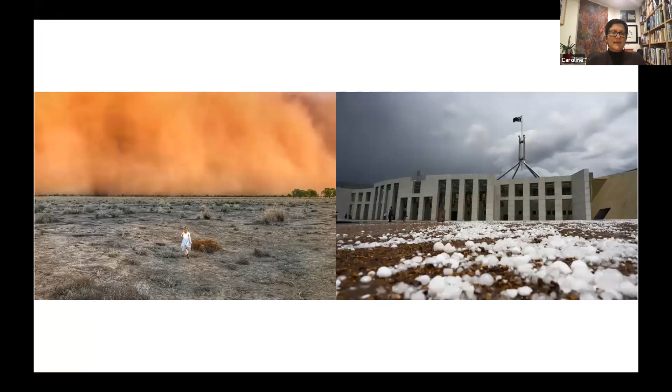And here we are. After that, we had dust storms, we had hailstorms, then we had floods—and we had floods even in the bushfire areas, as if they hadn't experienced enough.

Then along came COVID and a whole lockdown and a whole new way. And stunningly, we all took the science on board and acted quickly and found that change actually can happen rapidly and in huge amounts. It's very interesting.

And still it wasn't the end. Then we've just had this whole episode of yet another black man being killed. And it's not just in the States, it's here in Australia. And there's so much to deal with. But, you know, there is, as Audre Lorde says, there's no such thing as a single issue struggle, because we don't live single issue lives. And all of the things that we're currently experiencing are connected. And we just, you know, we need to kind of do something.

And I think that Vanessa Nakate sort of said, you know, we can't go back to what used to be. We need to really radically change. We need to do things differently. And we need to address all of these things together, which is kind of perfect. And I think with being totally disrupted, it's kind of the perfect time to do it.

So what can architects do? What should architects do? Well, first of all, I think, you know, congratulate every single one of you who have joined up to Architects Declare. And as of today, there are 906 signatures, which represents way more than 906 people, because collectively we can do an awful lot.

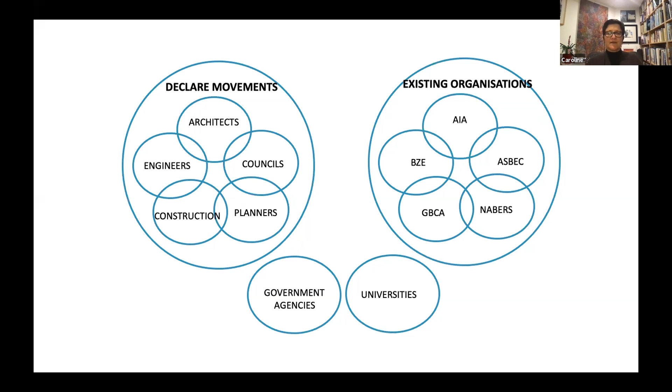There's a whole bunch of declare movements. There's the architects, engineers, there's councils, planners, construction, and I think together we can all help each other achieve what we've signed up for, but also support each other in making bigger asks. We're also working with existing organisations really closely who have been playing in this space, and let's all work together. We're working with government agencies and with universities.

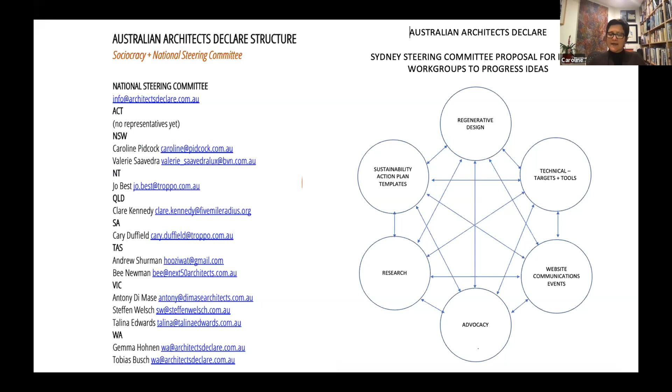We've set up a number of different task groups on regenerative design, sustainability action plan templates, technical targets and tools, website, advocacy, research. All of these will be, we're going to be asking people if they're interested in helping us with these different task groups in the very near future. There's lots of work to be done, but it's kind of exciting to be working with people caring about this.

The mission, which is on the website, there's a number of different points. I'm just tonight looking at Passivhaus, I'm just looking at a couple of ones, particularly the ones about regenerative design, because I think that's actually one of the key things that architects can contribute to, and then whole life carbon modelling. So you know what architects are good at? We're very good at understanding complex systems, how they connect and intersect, and how we can creatively realise the potential in the systems for the benefit of all.

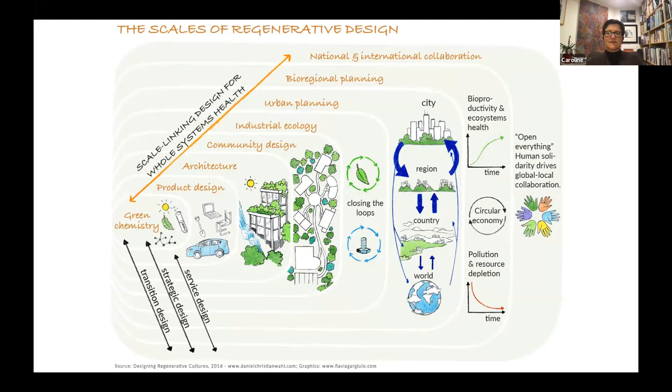We're so uniquely placed to do this, and right now that is what's needed, and it's such an exciting opportunity for us to step into. You know, the whole regenerative design happens at all different scales, at all different sizes, and I think what we've got to do is focus our attention on how we can create so much better things at all of those levels and connect them all.

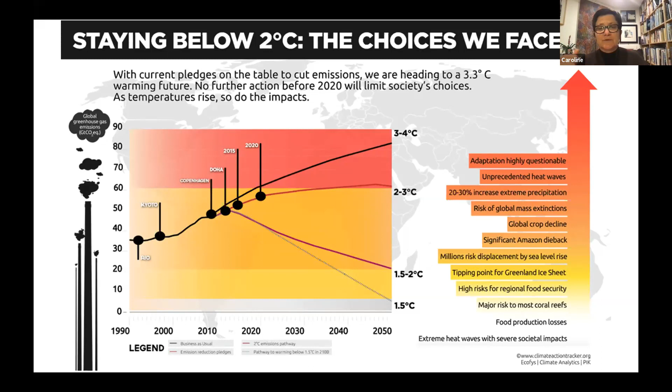Here's another one from the Climate Action Tracker, which shows again. So this is not a tweaking of what we do. This is not a 'put it off till next year or the year after.' This is serious stuff, but it's not that we can't do it. We can. It's just that what we've got to do is really focus our attention on different things, on how do we create fantastic buildings that we love living in that also address this.

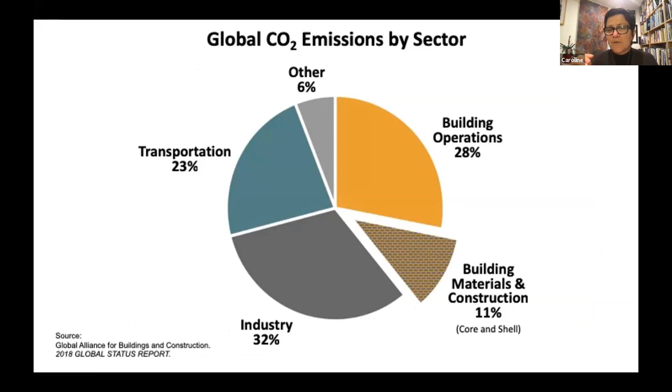Building operations - this is global CO2 emissions by sector. Building operations at about 28%, building materials, that's embodied energy, at 11%. So architects are playing in the space of about 39% of global CO2 emissions, and there's so much scope to do so much better.

In the UK, they've really named the targets that look at operational energy, embodied energy, and potable water use. They've split them into domestic buildings and non-domestic buildings, which are basically the two main types of buildings that will be built over the next 10 years, and looked at the targets that need to be hit in those spaces.

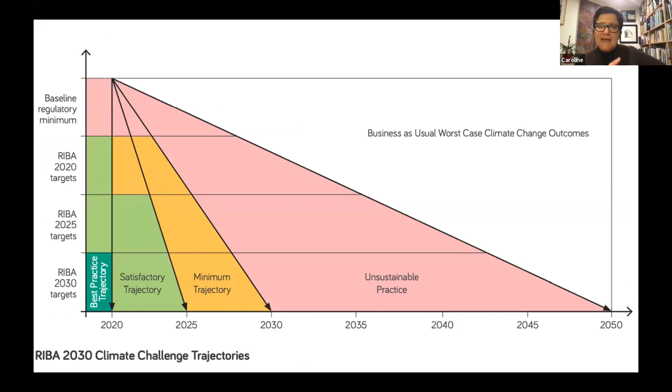In Australia, we've looked at operational energy, and tonight we're going to look at how to reduce that significantly. Embodied carbon is a whole big area we all need to address. And water use - I think Australians are fairly leading in that because we're a country of drought and little water. But this is kind of what that looks like. It's a serious dive down. So we've really got to look at how we can achieve these really big targets really quickly.

The LETI is the London Energy Transformation Initiative. They've done a whole lot of work. We're talking with them, and I'm working actively with a whole bunch of people, from Engineers Declare to Architects Declare to the Institute of Architects, ASBEC, BZE and others, to try and translate this. LETI have said they'd give us all their information, and we'll try and do something to work for Australia.

So within all of that, thank you, Passivhaus, because here's a fantastic way of really creating really healthy buildings that have absolutely minimal energy consumption. That's kind of where we need to be at the very least. And then we need to also look at embodied energy as well, within the framework of really regenerative design.

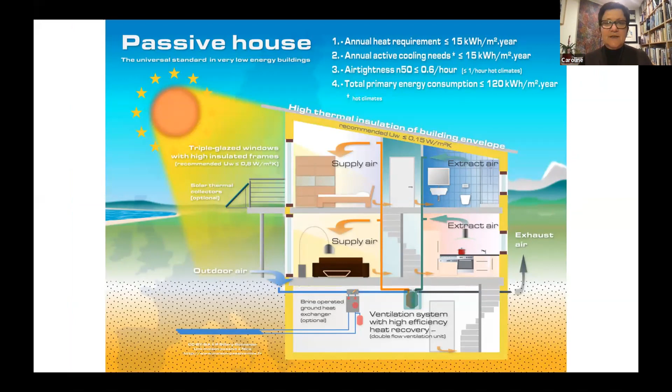So the Declare movement is actually an invitation to be part of co-creating the regenerative future we need. So if you're not already signed up, it would be great for you to get involved and be part of it. Take responsibility for achieving this with us and help us do it, because together it'll be a really exciting and interesting journey. And it's a journey we just absolutely have to take. So thank you very much.

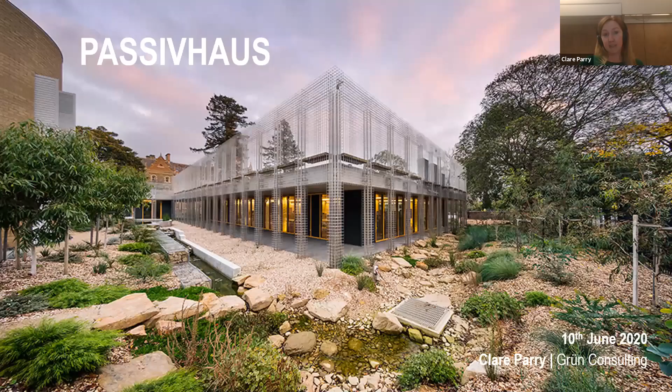But tonight I have to focus - I have to just talk to you about Passivhaus. There's a lot that I have to say about Passivhaus, but there's a lot I can't say tonight. But if you do have any questions, please get in touch with us. One thing I will say is that you can't unknow Passivhaus, and this has been my experience. I came across it about 12 years ago, and now I run a Passivhaus consultancy. That says everything - once you know, you can't go back.

And the reason you'll continuously hear about it from anybody who knows about it is because they love it. So most converts I know change the way they work. I hope that's true for some people here. The other thing I will highlight is that you'll start seeing thermal bridges absolutely everywhere you go - window frames, structure, anything you see. Thermal bridges everywhere.

My recent foray into it has been with my own home, which is this. So the other thing about passive house is, how do you know someone lives in one? It's that they will tell you. And I tell everyone, because particularly at the moment, particularly as we're all at home starting to realise - I happily moved into my passive house home in October, and the timing couldn't have been better.

So right up front, I'm going to say passive house isn't everything. Passive house does a few things extremely well, but it does need to be part of a bigger holistic picture. It does efficiency, health and comfort. It doesn't do embodied energy, it doesn't do water, it doesn't consider transport. It's part of a picture.

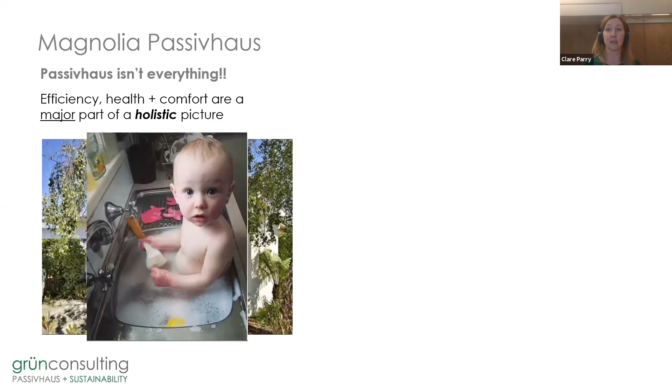So with my home, we like to joke that we did this renovation because we outgrew the bath. Really what we did - we had a really old house, 110-year-old double brick. The big problem with real estate is that you often don't get to choose what you buy, particularly in major cities. You take what you get, so every building you buy often has a lot of problems. This was very true of my own home. So we knocked off the back half and rebuilt it.

We've very quickly learned, particularly in the last few weeks, that the old bit is extremely cold - it's about 12 degrees inside most of the time. Luckily, I'm working in a passive house.

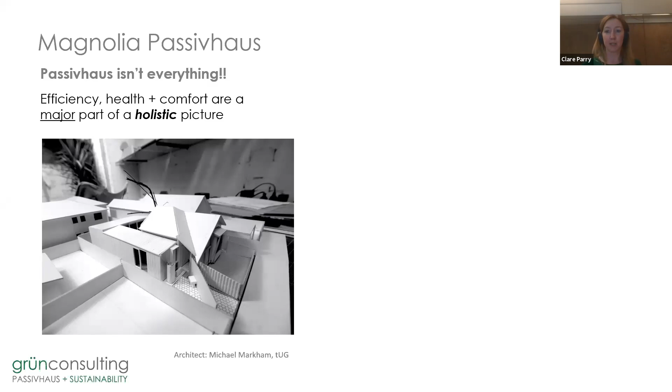So part of the bigger picture with this particular project - and I'm a big advocate for rating tools like the Living Building Challenge - we took our inspiration from it. I actually did want to certify it to the Living Building Challenge; it was just a bridge too far on this project, but highly recommended, Living Building Challenge. So red list free, focus on materials, absolutely. Dematerialization - it's timber lined, there's no plasterboard for example. Triple glazing, double stud walls. So the thermal performance aspect was just a part of it. Renewable energy, no car parking, for what it's worth on a single family home, and rainwater as well.

So one thing we're all quite familiar with is the concept that it's really hard to convey big ideas in a concise way. But I think that's what Passive House does extremely well - it's 5 things. So the takeaway from this presentation, I hope, is that if you do a few things really well, you can still get a great building. I'll go through these in a lot more detail shortly.

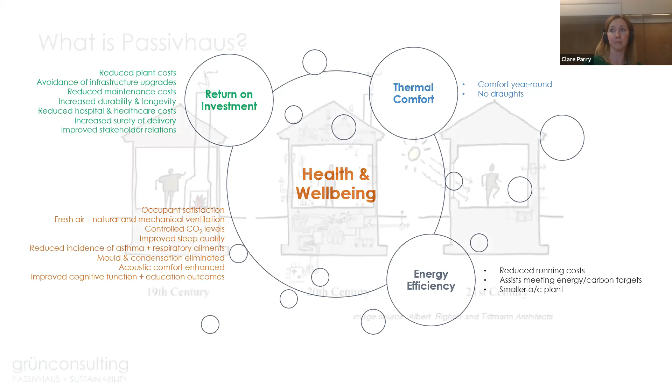One of the neatest ways I think I've ever seen Passive House summarised is this. Back before we had technology, buildings were pretty simple, we could consider them pretty dumb boxes. We added heating in winter and that was about it. As technology advanced, buildings kind of didn't, so we started to just overlay tech fixes to problems that we've actually realised shouldn't have existed in the first place.

This 21st century solution, this new idea, is that buildings should do most of the functions that a building performs without tech solutions. Then there are a few straightforward systems that can provide, for example, ventilation and supplementary heating and cooling, which ends up being much, much smaller, drastically smaller.

This is Elrond Burrell, he may even be on the call, hello if you are. The best way I've ever seen Passive House described is think of it as a Porsche, maybe compare a Porsche to a Ford Focus. They're both cars, but the experience of driving one is absolutely different to the other. It does the job, but it's not the same thing. So one thing I would recommend, one thing I would probably say about Passive House, is you probably aren't going to comprehend it exactly until you've been in one.

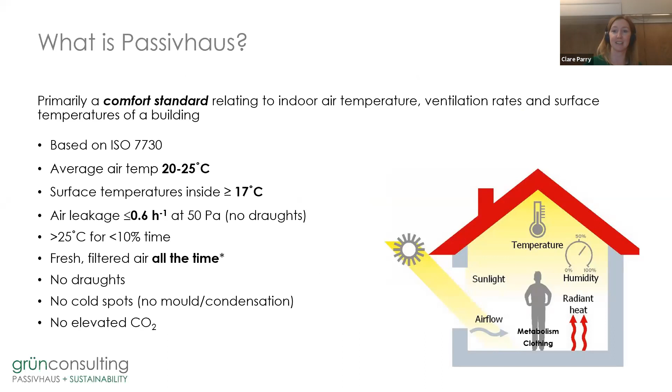Without going into this in too much detail, Passive House is a comfort standard. These are all the metrics. It's quite a technical standard, created by physicists. As a result, I'd almost say it lacks a bit of marketability. German physicists aren't known for their sales ability.

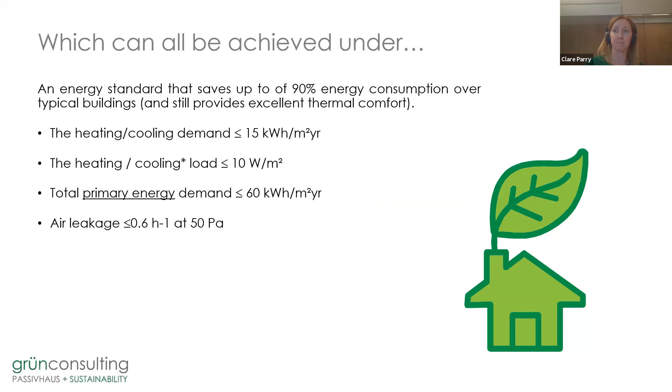But all of those metrics, which basically equal comfort, can be delivered under an energy standard. These are the numbers - this is what, if a Passive House meets these numbers, it's a Passive House. But leave these numbers to the Passive House designers. Don't get caught up in needing to know about the physics.

I'll help you understand what those 5 rules are. Number 1, high level of continuous insulation. The idea is that it's not interrupted essentially, and that might sound extremely simple.

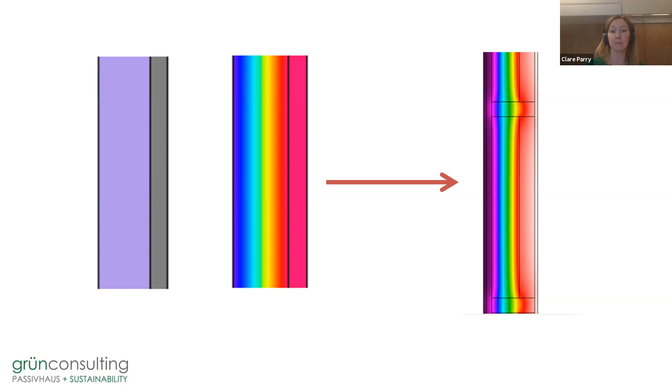It's not achieved well in practice. For example, the code - it's getting better - led us to believe that an R2.8 wall was an R2.8 batt in a stud wall or whatever it might have been. In reality, once you involve that stud in the construction, it breaks it down so that it basically interrupts insulation, reducing thermal performance slightly. So what might have ideally been an R2.8 wall might actually be R2, which can be accounted for and should be accounted for, and is tolerable in some sense.

What isn't exactly tolerable is when you put high conductivity materials into those walls. There are versions of construction that don't work so well in passive house. I'd say a great way to overcome this is to separate the structural and thermal lines. That's an easy win, but a passive house designer can help you overcome all these issues.

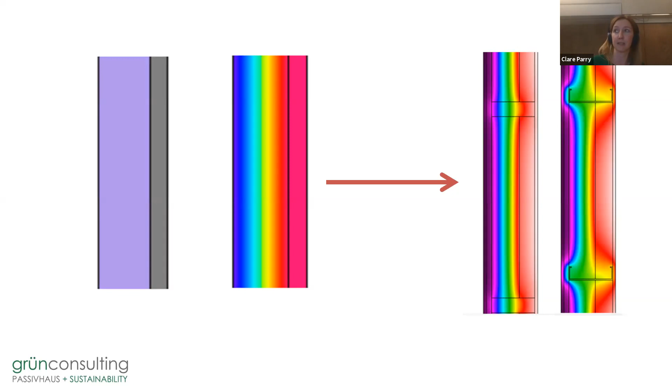Number 2 is airtight construction. It doesn't mean the building is airtight - the windows should open. This means the envelope is airtight. And what that essentially is saying is that air should be controlled.

It's not an airtight building, as I mentioned. Airtightness has started to come into the code, so you can now comply with it - it was always there, but it was descriptive. It wasn't enforceable - you could sort of say, yeah, I tried, but how hard did you try? You can now use blower door testing to comply with the code, but it is an optional element. It has a massive impact on performance.

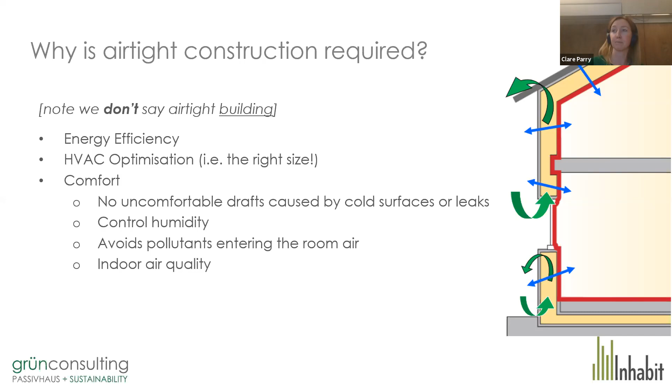What we are trying to say is that air doesn't go through the envelope layers - that undermines thermal performance entirely, but it also doesn't come into the building through uncontrolled gaps and leaks. Also, don't think of airtightness as this plastic rain poncho. Think of it as Gore-Tex. The building still needs to have vapor permeability, ideally, which is also creeping into the code. This isn't technically something passive house demands, but it is absolutely good practice.

Number 3 is minimise thermal bridges, which are much more prevalent than we consider, especially in Australia. Often we have expert architects from pretty much anywhere else in the world come over and say, I can't believe the way you build. I think it's something most people just aren't as aware of as we need to be. This has come into the 2019 NCC.

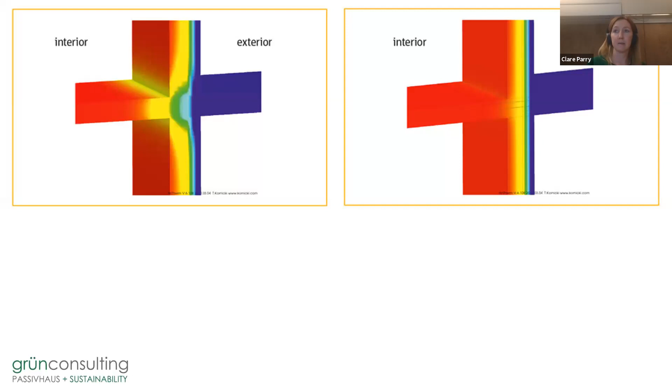You see a lot of these pretty pictures in the passive house world. These are thermal heat flux images, essentially showing temperature. So in this one, blue is cold, red is warm - 20 degrees on the inside. Thermal bridges are just where heat flows from inside to outside.

How this impacts us is really vapor damage. Humidity is prevalent in air - all air has moisture in it to a varying degree. Where we have thermal bridges, what plays out is either visible or interstitial - so in the construction - moisture damage and rot, deterioration. They're bigger issues than we give them credit for.

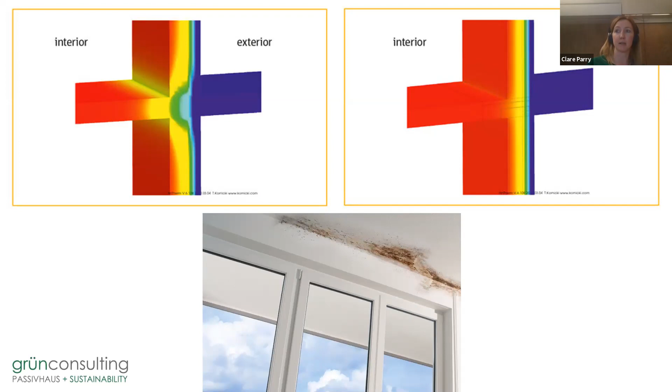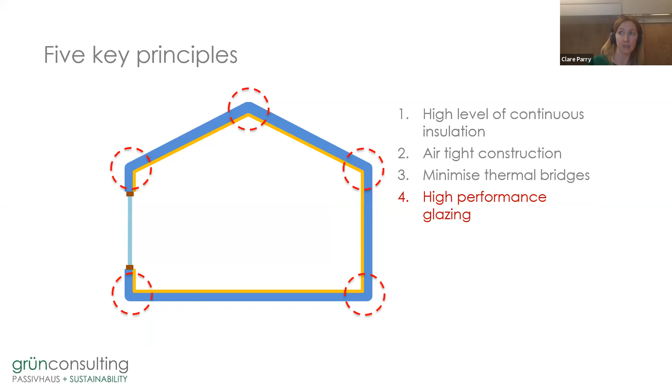High performance glazing, very, very important. If we consider glass or the windows, the entire window to be part of the thermal envelope, it should ideally perform as close to the wall performance as we possibly can. The thermal losses through windows and frames are typically the very worst performing element in an entire building for thermal transfer. So we go to all this trouble of insulating a building and then we put poor windows in. It's very much a waste of time.

Condensation at best is annoying. At worst, it creates mold, health issues, respiratory issues, and condensation should be designed out, and it's actually practically designed out in a passive house design.

Now, the ventilation system. A ventilation system isn't mandatory in passive house, but it's kind of the ribbon that ties the whole concept together, or the cherry on the cake. Once you have an airtight building, you need to consciously ventilate it, and ventilation is just a function of healthy spaces. This can absolutely be natural ventilation, but then among other things, you get 0% heat recovery.

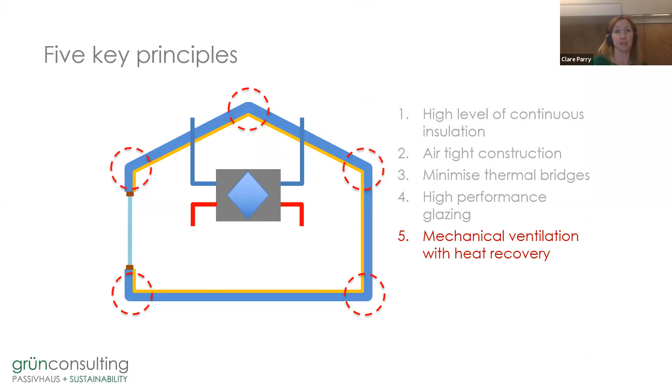And as well as that, you have to manually intervene every time you need fresh air. You might need fresh air overnight, you might need fresh air when you're out, because you're not just providing air for people, you're also extracting excess moisture, VOCs, all sorts of things.

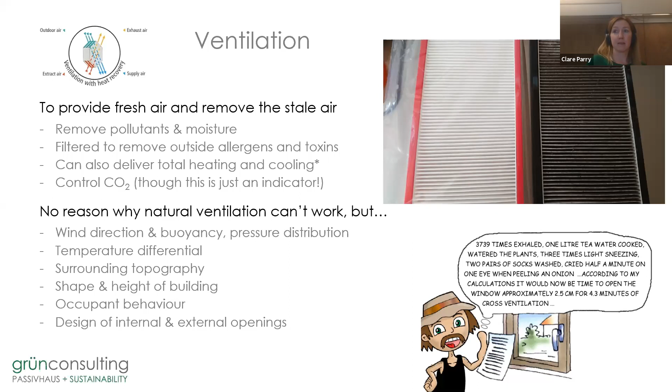In a passive house building, I'd say about 99% of passive house buildings have this ventilation system. It is actually incredibly simple. It's a core where air streams flow past each other. They cannot mix, but they flow past each other, and heat is recovered. In some systems, humidity is also recovered. It has 2 fans and a core, and it's an extremely simple system.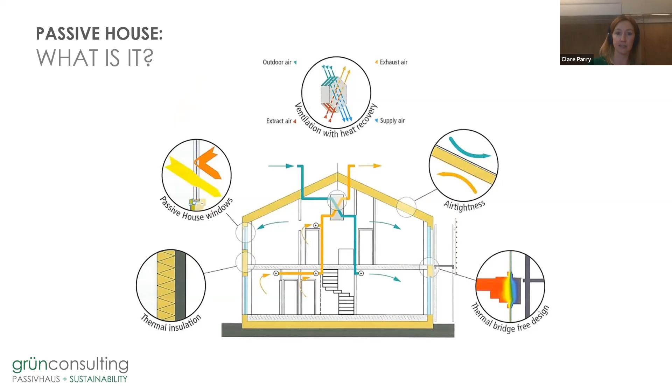This image is one that you'll probably see every time you do research on passive house. It's from the Passive House Institute, and this is just a summary of those 5 things. It's simple, I hope that's one key takeaway from that. That's passive house at its core. There's obviously a little bit of know-how to it, particularly when it comes to designing actual buildings. I've really oversimplified there, but those are the 5 key principles, and done well across a building of any scale, of any type, of any size, of any construction type, of any usage, there really hasn't been too much limitation. And I've got quite a few examples coming up.

What does passive house have to do with net zero? I think it's basically the best, or the most optimized way to get there. One of the ways, or why passive house is not net zero, is probably a good thing to explain. Passive house isn't net zero because net zero in a single building is incredibly expensive to achieve.

So net zero on site: passive house stops just short, and it stops at that point where, and it was determined for when it was first established, that's where you have a really big step change in the type of heating and cooling system you need to serve a building.

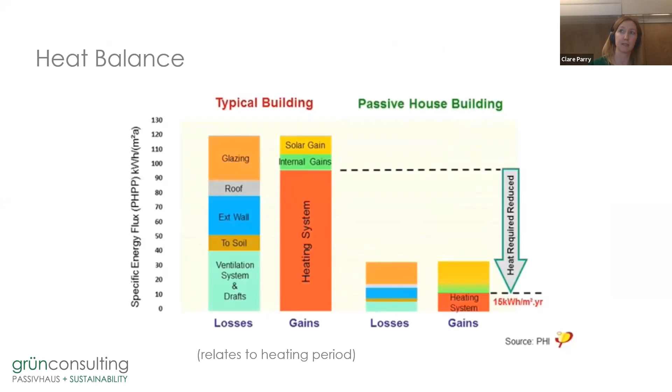Passive house is considered one of the really logical ways to get to net zero with optimizing everything. I'm not going to dwell on this too much, except to highlight that it's the heating and cooling systems, the active systems, that we're minimizing in passive house buildings by optimizing the construction or the building fabric. I'll skip past this because I don't want to spend too much time on it.

How does this fit in with the National Construction Code? I've been doing passive house buildings for about 10 years. Pre-2019 code, passive house looked like it was about 50% more insulation than the NCC in Melbourne. In Sydney it's much easier, you could probably say it's 20% more insulation than a code building, but it's about how you put it together.

As I mentioned, that whole continuity of insulation, the airtightness. The 2019 code is stated to be about 30 to 40% better than 2016. So your baseline is now a lot closer to passive house, and we've found that with some recent projects that we've examined in detail.

Some new bits in the 2019 code, and this is looking dangerously like passive house, right? We're starting to do condensation risk assessments. Airtightness, so blower door testing, is now in there. Thermal bridging is now considered in a much bigger way. So we're starting to see the elements of passive house come in, and you might be thinking they're pretty fundamental, and I'd agree.

The one thing I would say about the code though is it's still quite elemental. We still consider things in little packages, we don't look at the system, and the code is also reactive. We had big issues with complying with fire requirements, which in many ways undermined the airtightness membranes we were trying to use for a while. But that change came in 2016, and in 2019 it was refined, so now we can use those membranes again. We had massive issues for a while there getting non-residential buildings to be airtight.

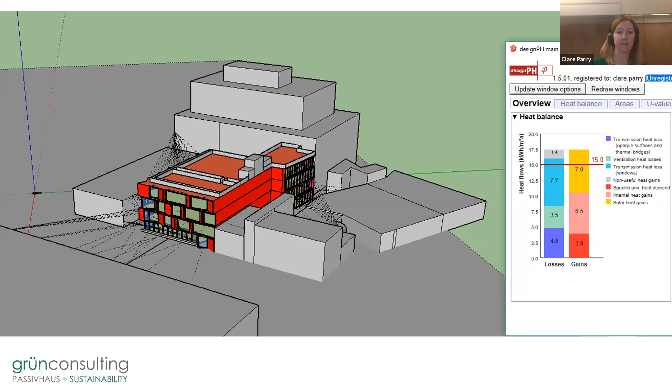It considers the site, location, context, surrounds, and shading. We also do a lot of thermal bridge modelling. This is Gillies Hall, which we'll see in a lot more detail shortly from Simon. A lot of thermal bridge modelling, particularly in 2D and 3D, capturing a lot of things that aren't considered in other design processes. As I mentioned, passive house modelling is done in an Excel spreadsheet.

It considers climate, all of the envelope performance, all of the solar impacts, including shading and surrounding topography. You also include ventilation systems, heating, air conditioning, hot water appliances, and renewable energy. One thing I probably didn't highlight is that there are limitations on how much heating your building should need, how much cooling it should need, how often it overheats, and the total energy use, which includes all the systems and appliances in that building.

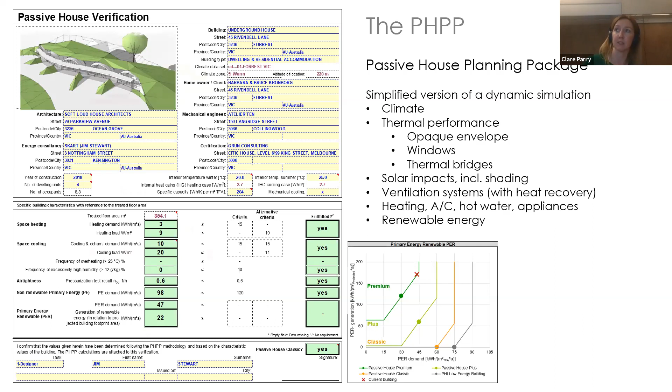Quality assurance in the Passive House world - I suggest engaging with a Passive House designer if you do want to achieve a Passive House project. None of these are mandatory though; you can deliver a Passive House building without touching any of these.

A Passive House designer has been trained and accredited, as has a tradesperson, to deliver compliant buildings. A Passive House building certifier can come along and give you this badge at the end of the day - the plaque that goes on your building to say, yes, this is a passive house building.

Certified components are not mandatory. You can build a passive house out of anything you want, and most of our projects deliver them using off-the-shelf products. There's nothing special required. The market that's catching up fast is windows - obviously you can't use single glazed aluminium frame windows, the typical ones that we find everywhere.

The certified component that I do recommend everybody uses in every project is a ventilation system, because there's such a massive range of systems out there - some of which are, to put it bluntly, quite rubbish, and some of which are amazing. And then there's certified passive houses.

That's the badge that you're looking for at the end of the day - this tiny little plaque, which Simon might share for the Gillies Hall one, but it's quite underwhelming. It's roughly, what would that be, maybe 4 or 5, or about 20 centimetres by 20 centimetres. It's optional - you can have a passive house and say you've got a passive house without getting this badge. It's an excellent form of quality assurance though. If you tie a contractor to it, they tend to pay attention.

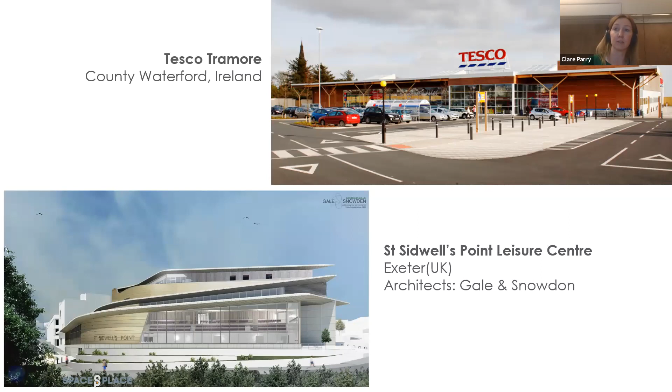Passive house supermarkets, passive house leisure centres, so huge aquatic centres - there's a few of them around the world now. Passive house high-rise commercial buildings, passive house museums. I'm getting sick of the word passive house myself here.

High-rise apartments. The Austrian embassy in Jakarta is a really interesting one - a really extremely hot and humid climate, a very successful project that's been in operation. It was one that I used to use quite a lot as an example when I was starting out in passive house. It's been in operation for at least 10 years.

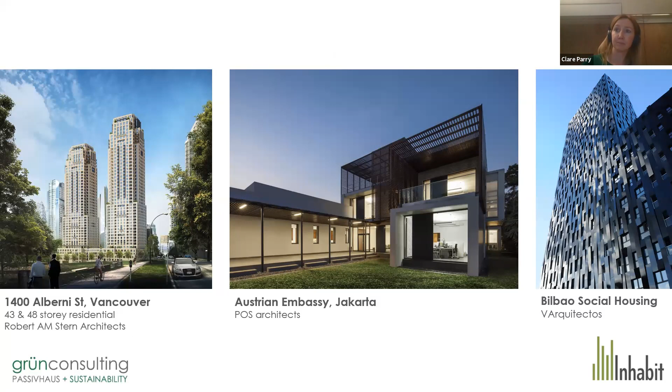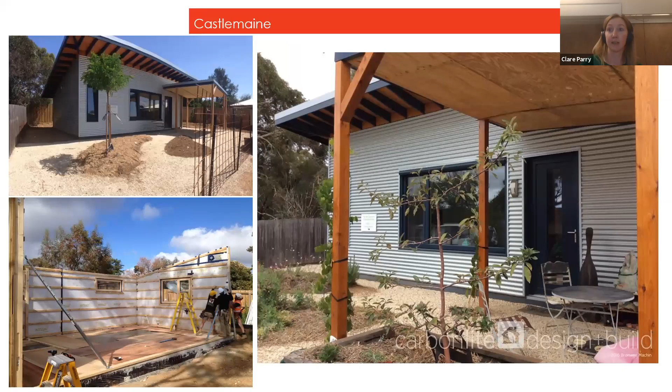That's the end of my presentation. There's a lot there, so thanks for your patience. I will stop sharing because I'm very excited about this case study for Gillies Hall and I don't want to take up too much time.

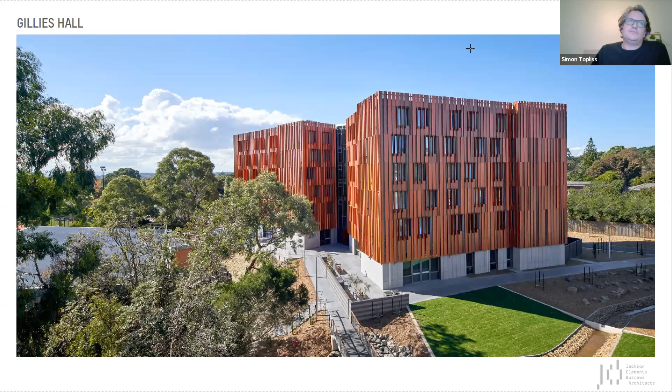It's currently the largest project, as Stefan pointed out, to combine mass timber construction and achieve full passive house certification in Australia. As a student accommodation building, Gillies Hall aligns to the university's strong pastoral care philosophy, providing 150 studio apartments and communal spaces throughout for students to cook, study, sleep, and socialise.

But the story of Gillies Hall probably doesn't really start with Gillies Hall. It starts back almost in 2014 to 2016 when we worked with Monash and 3 other firms of architects, Hayball and HRMA and MCR, delivering 4 student accommodation projects on campus.

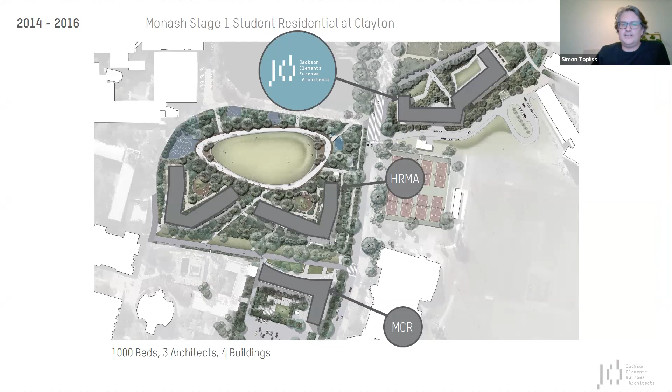We delivered the Turner building, up in the top right. These were 1,000 beds delivered to campus: Logan Hall by McBride Charles Ryan, Campbell and Holman Halls by Hayball and HRMA, and Turner from ourselves. We delivered these with Multiplex as well. These were 5-star Green Star as-built buildings, 1,000 beds delivered in 21 months.

These were exemplar sustainable design, I think, as we thought of it in 2014 to 2016 when we completed. But these were very much business as usual - precast business as usual, shading compliant glazing business as usual, meeting all Section J requirements, and veggie gardens. And we achieved our 5-star Green Star certification.

But what we ended up with was, I think, 4 buildings that as a result didn't perform terribly well. They have high operating expenditure, and the pathway of business as usual, whilst we had all delivered pretty good outcomes architecturally - agreed amongst the community - in terms of sustainability performance, operability and OpEx performance, was something that left a little to be desired. I've got nothing against veggie gardens, but it felt that maybe we just somehow missed the mark in some way.

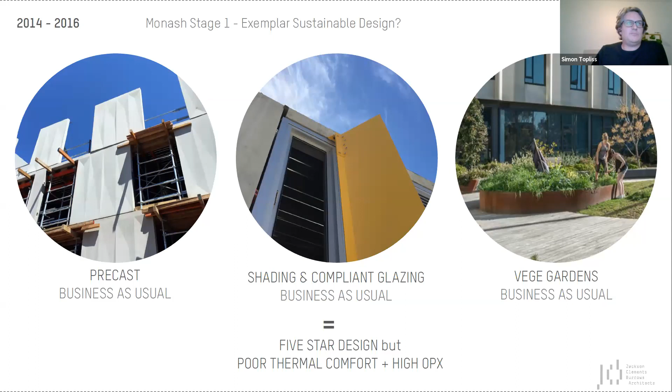So Monash, through the last decade, has really been moving forward with their net zero initiative. This has been running in parallel with energy efficiency, campus electrification, renewable energy, offsetting, and a microgrid on campus. So they're a very educated client, as you'd expect from one of Australia's leading universities.

On staff at Monash is a wonderful sustainability engineer, Rob Brimblecombe, who's been working away in the background exploring passive house from very early on. I know he was talking about it in the background when we started working there on campus back in about 2012.

And what we all sort of knew would come out of this was that the passive house standard would deliver a vastly different building in terms of carbon and energy usage.

So there was a kind of groundswell within Monash, and Rob managed to get enough people on side to take a brief out to the market in June 2017, which is when we came onto the project, to look at a student accommodation building with 150 rooms with support accommodation, and we were encouraged to attempt passive house certification if we could get it over the line.

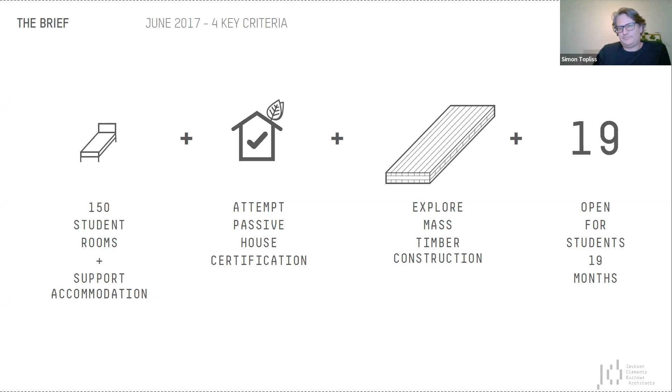We were also dangled the carrot of exploring mass timber construction, but all of this had to be done with the proviso of having it open for students in 19 months, which was quite a tall order for anybody who understands normal timeframes of projects. That was a fairly ambitious timeframe, even if we weren't attempting something innovative in terms of sustainability.

So Gillies Hall is a story about going large with passive house in a warm climate. There are a couple of small examples, but especially in Australia, there were no large scale buildings like this. We found very early on that the Melbourne climate is particularly cold in winter, so we have 6 months of really relevant temperatures for the passive house model, but we also have extreme summer temperatures, over 30, 35, 40 degrees at times in Melbourne.

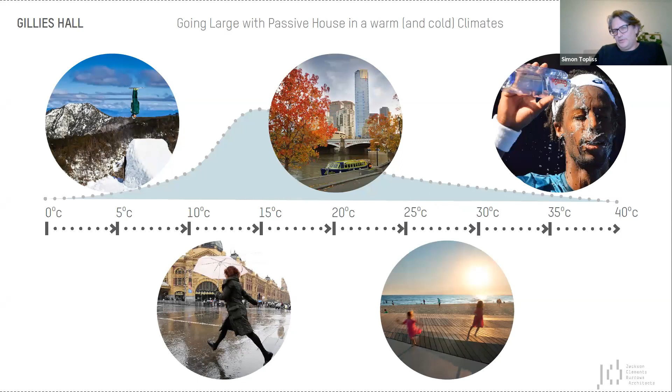It's also a story of going large with mass timber. In Australia in 2017, we didn't have any local suppliers, so we had to look at potentially overseas suppliers, trying to deliver the project in the timeframe, and trying to understand whether mass timber and passive house were really well suited to each other. And of course, from an architectural and project delivery point of view, we had to deliver this within 19 months.

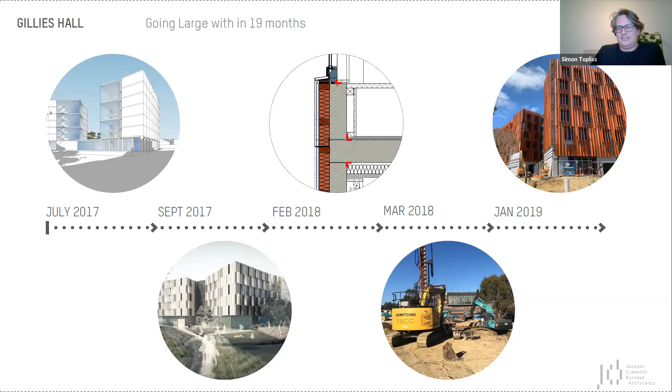So concept designs back in July 2017, go out to the market with some schematic design in about September 2017, so we could get a builder on board early enough to understand the journey we wanted to take. Get enough detailing underway by February 2018, so they could start construction in March 2018. Then hand over for students around February 2019, ready for semester 1 last year. A pretty tall order.

How did we do this? I think Claire touched on this. We all got on board from day one - client, architect and design team, and then Multiplex the builder when they came on board. From the client side, this was having Rob Rimbicum as a sustainability engineer, and two fantastic project managers from Monash, Ryan Spittle and Richard Felcher, who were there to support us through the journey and help with procurement. There was also the greater PCG to assist and endorse where we were trying to take it, and a design team ready to go from day one and committed to the project. That was really, really important.

So where did we begin? Well, literally on day one, before we had put any pen to paper, we had a meeting with Pablo from AECOM, our ESD engineer on the project, and David Ritter from Atelier 10, one of the other local experts in passive house. We sat down with them and said, where do we start with this? We have a few books on passive house, we're ordering a few more on Amazon, and we've got a little bit of knowledge on mass timber, but where do we really begin?

Both of them really said, well, you've got to start with first principles. You've got to start with site. You've got to start with basics. You've got to start with the orientation, and you've got to understand your massing. Once you've got those right, we'll start to talk about the finer details. But please just get it right to begin with.

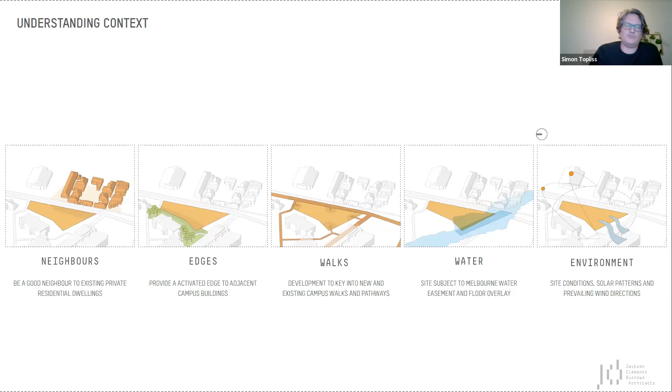And especially relevant to Passive House, we had this north-south site. So we had the very real danger of having a lot of east and west facing rooms, which were going to be very difficult to shade and potentially deal with overheating issues.

So to develop the massing, we had Passive House especially in the back of our mind to begin with. To develop this formal language, we took the typical double loaded corridor plan and laid it north-south down our site. When you're doing student accommodation buildings economically, you do literally like a hotel, and you run a corridor down the middle, rooms off each end, and run them as straight as you can.

But this didn't seem to work on the site and would have left us with a very problematic east and west facing glazing. So we broke these forms apart. We split the forms and rotated them to reduce overlooking and improve the solar orientation of our wings.

Then we teased these forms apart to create a central gathering space instead of corridors, and importantly introduce light to the centre of our plans in the wings and cross-flow ventilation across the floor plate. I'll touch on this a little bit later and how this works in Passive House.

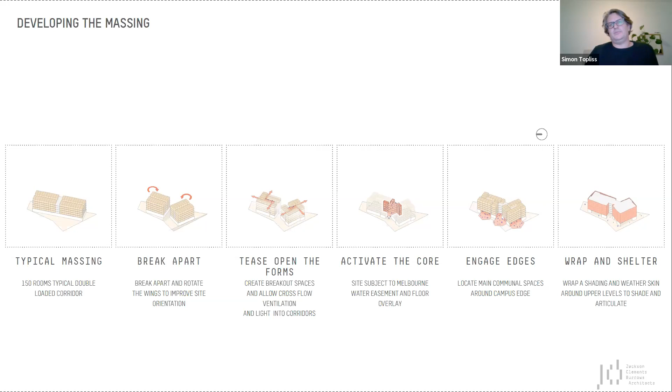Centrally, we located the main social and circulation spaces to activate the core. At ground level, we ran our main common rooms around the campus edge of the building to allow life to spill from inside to out. Then we articulated the form by wrapping the upper levels in a screen to protect the rooms from the sun and weather. This screen was really one of the key tools we had in protecting the building and starting to deal with our shading, and I'll touch on that as we move through the presentation.

But what I might do to begin with, before getting into the details of how this building came together, is just walk you through the spaces. The ground floor houses the apartments for the deputy and college head who live on site in the building - those are in yellow. The blue spaces are the communal spaces where students gather to watch movies, cook, eat and gather. There are places to practice piano, gaming rooms for AV and study, and study areas. This is all on the ground floor.

These spaces locate and are wrapped around by the new landscaping, which is their private communal spaces. And then in the centre of the building is the entry, double-sided with Passive House doors on both sides, and then stairs which run up through the building.

The upper levels of the building, levels 2 to 6 at Peninsula, is where the students live in 30 apartments per floor - so 5 floors, 150 apartments. The centre of the plan is where students cook, eat and study, and they're connected by 2 stairs which spring off the centre of the plan.

Each of the floor wings, as we call them, are 15-bed floor wings. They have studio apartments in these wings, and each apartment has its own bathroom, a small fridge, hot plate, and obviously their bed and study desk. So this is where they sleep and meet.

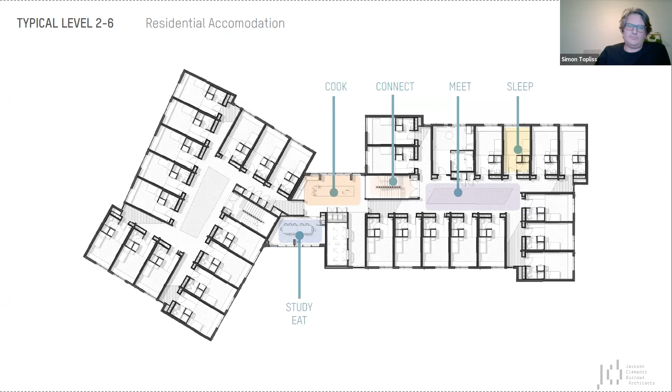Now, from a Passive House perspective, what are the basic building blocks of Passive House in this plan? It starts with the heat recovery mechanical ventilation systems - and it's great because Claire's already explained how they work. Each of the rooms in the plan has a heat recovery ventilation system, a supply and return to every single room, so every room is provided with fresh air on a constant basis.

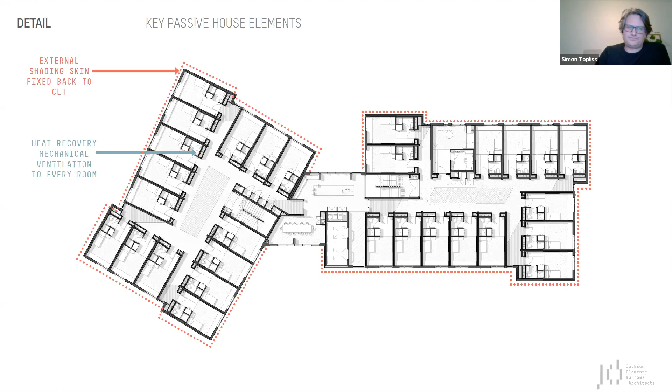There is an external shading skin, which is fixed back to the CLT, which is a thermally broken connection. All the facade is fully airtight.

Now, on Peninsula, at Gillies Hall, we used CLT, our mass timber, which is fully taped facade. We've got CLT facade panels running around the whole perimeter of the building, and those panels are fully taped to create that airtight envelope. And then we have our double glazed thermally broken windows, which are again fully taped back to the CLT facade panels.

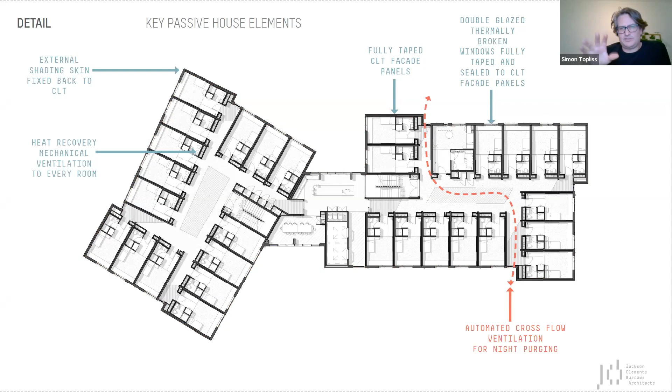We're using automated cross-flow ventilation where we've split that plan form open to help bring our temperatures down at night during those extreme months. So when temperatures get high in November, December, January, February, and students are in there, we can use automated night purging to bring temperatures back down in the evening if the building starts to heat up. We've also got the continuous external insulation skin, one of the fundamentals of passive house, and a thermally broken skin at that, running around the full perimeter of the building.

This is a mass timber building, so how the structure works ties into especially our envelope, which I'll go into more detail. We've got a traditional concrete podium, which is our level 1 or ground floor at Gillies Hall, and we built on ground. One reason was the Melbourne water overlay, the flooding overlay on site.

We had large span spaces on ground, spaces that probably suited more traditional construction, and the time constraints of the project allowed us a little more time before we needed CLT panels on site. So then the CLT levels, the cross-laminated timber levels, are the residential levels 2 to 6.

The key part was that we had a complete envelope that was CLT, and the quality of CLT panels we were using is inherently airtight. So all we really needed to do was tape the joints in the panels to achieve that passive house envelope. Also, by using CLT on our facade, which is inherently a low conductivity material, we had a very good pathway to achieving our thermal detailing, designing away the thermal bridges on our envelope.

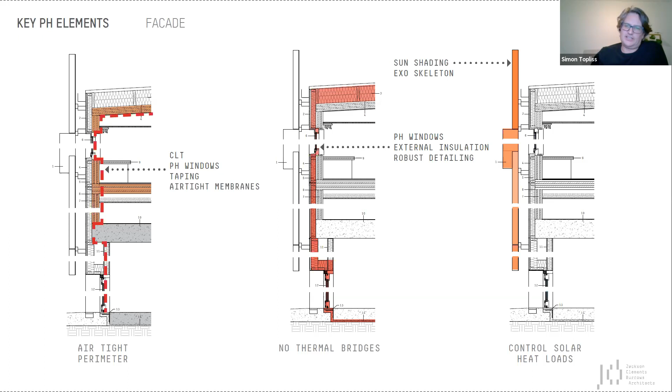So, passive house in detail, zooming into that, hopefully you can see this fairly clearly at home. You've got the CLT panels running along, and what passive house ends up requiring is creating a series of gaskets and joints to achieve that passive house envelope.

If you look at the two facade panels, the two mass timber panels, there's a little light blue line - that's an acoustic gasket which helps isolate the two panels acoustically, so one room from another. Then you've got the passive house tapes, so the panel joints are taped externally. In this case we also taped internally, which was really a belts and braces approach from Multiplex - they wanted to make doubly sure we were achieving that airtight envelope.

The windows are then carefully located within that wall line, so we have timber windows externally, which then have an external aluminium capping, and there's a thermal break between those, located such that the thermal break is just on the insulation line. The location of the window within that wall build-up is always quite key in passive house. Between the window frame and the CLT there's a little dark red dot - that's an expandable sponge membrane, and you're then taping both sides.

There's a lot of work that goes into what comes up as a very simple detail. What was remarkable was that this detail pretty much got us through most of the upper levels of the building. For this building we ended up with about 3 A1 sheets to detail the upper levels. The ground floor, which was much more complicated and much more stick built, we ended up with about 10 sheets detailing.

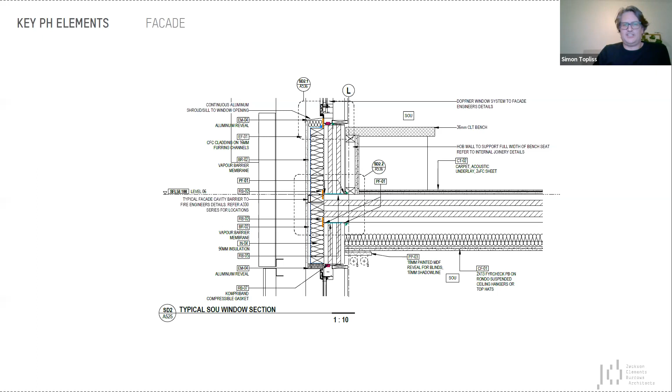It wasn't just about making sure we got the whole building working - we wanted to make sure that every single one of the rooms worked. So our rooms facing south needed to perform just as well as the rooms in the top corner facing north.

The great thing about passive house, especially at Gillies Hall when you're using heat recovery ventilation systems, is that the heat you recover from the north rooms, which get a bit more solar gain, can be transferred via the heat recovery system to the south rooms. So you get this wonderful expression - the socialization of heating in the building. You're looking at the building holistically, ensuring the southern rooms perform just as well as the northern rooms.

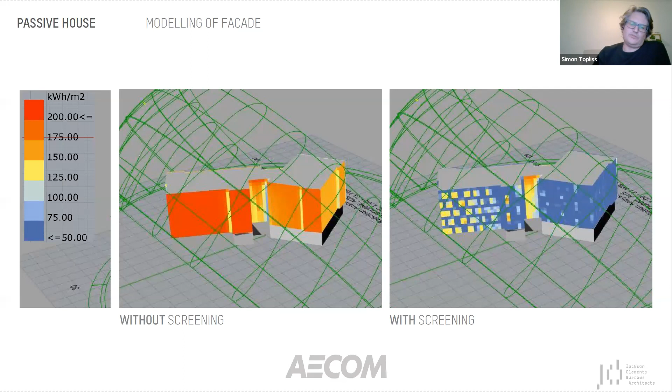We were looking at this from very early on. Also from very early on we started modelling the facade and realised we had a real journey to go on, knowing that without screening the building was subject to pretty massive heat loads. One strategy put forward early by the ESD consultants, which we thought was solid, was to apply an external screen to the building to take these heat loads off that external skin.

As we moved through that development, we took this facade - on the left-hand side the very basic ideas of the facade, the screen which shades the windows depending on orientation. We tune the building in for orientation, whether north, northeast, northwest, southwest or southeast, changing the depth of those fins. Using metal fins, aluminium, and adding folds into the metal framework, we make the shading screen material as efficient as possible, using as little material as possible to increase the spans.

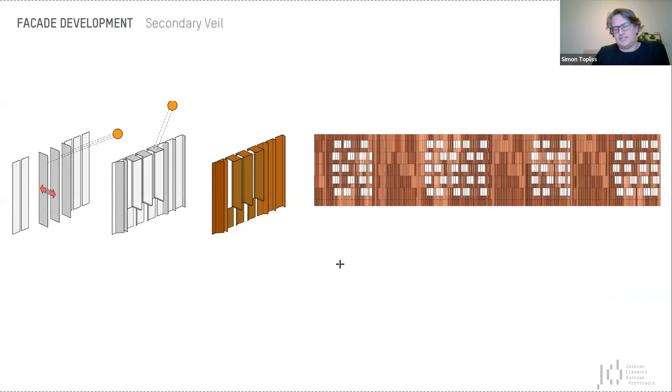By doing these little subtle folds, we also started to play architectural games of shadow, light and colour, and then applied a subtle patination over the facade. In Gillies Hall, these are the sort of images you've seen, and this is the result: windows that are really well shaded, tuned to each orientation, and carefully played within, with a surface that plays these architectural games of colour, light, shadow and delight. So the passive house concept was really starting to inform that architectural language as the building developed. I think that's one of the really exciting aspects we found early on.

The key passive house elements also include the heat recovery ventilation systems. Claire's walked you through how these work. This is a 3D AXO of one of the larger rooms, the accessible SOU. Each room has a supply and return, which run up in a stack to the underside of the level 6 roof slab, then join together in a spaghetti junction and go up to a single heat recovery ventilation unit on each wing of the building. So this complex system comes together.

These systems supply each room with the required 10 litres a second of air, so the rooms are constantly getting fresh air. Each room has windows, and students are free to use them if they'd like to. There's absolutely no restriction, as Claire pointed out, in having windows in a passive house building — to all intents and purposes it's perfectly normal. If a student wants to open a window, they're at liberty to do so. On summer evenings, if their room has heated above 25 degrees and it's less than 25 degrees outside, it's a no-brainer for students to open their windows and help cool the building.

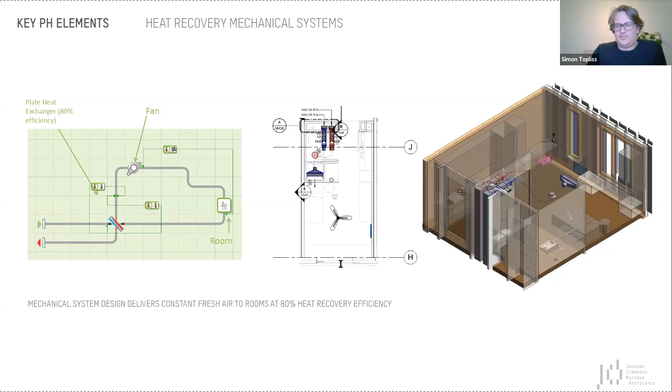You've just got this enormous thermal transfer from inside to outside. We actually went out to tender on Turner with a lightweight facade, but were value managed — the market determined that the only way Turner was feasible at the time was to move similar to the other buildings, which was a precast facade. On Turner, the agenda was 5-star Green Star, it seemed, so that was the direction we all headed. I think that's probably where the building really starts to pay the price in terms of performance — the fundamentals and basics of detailing are just really missed.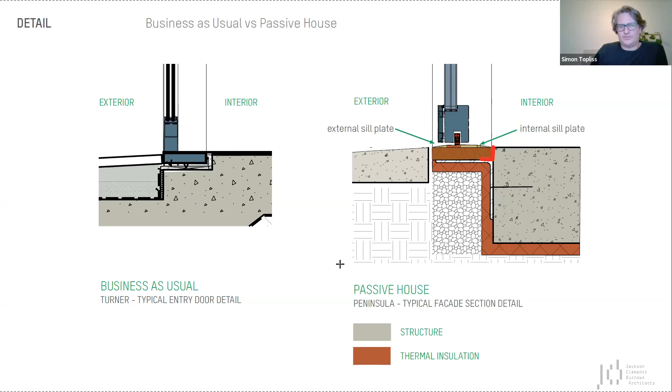The other place where we almost came unstuck, amusingly, on Gillies Hall, and this always embarrasses me, is the fridge. In Australia, the best fridge we could find on the market, performance-wise, was a Hisense 157-litre fridge, 190 kilowatt hours per year. This is what we had in the Passivhaus model for quite a few months early on, and we thought we were home and hosed. Then we went and looked at it, and the client went and looked at it, and we realised it was not up to scratch for a student accommodation building, shall we say.

In Austria and Europe, where similar types of student accommodation buildings are done, I witnessed similar fridges by Liebherr. You had literally half of that from a kilowatt hours point of view, and a really functional, great fridge—not available in Australia. So we faced the real prospect of the fridge being the actual element in every room that was going to make us come unstuck. We did manage to find a Haier fridge, a three-quarter fridge, 304 kilowatt hours per year, actually a very, very good performing fridge in the Australian market, and that got us over the line.

In Gillies Hall, we don't have radiators—they're gone. There's no need for internal heating because our internal heat loads from fridges, laptops, and the people in the building are providing the heating for the building. It was the fridge that actually just about tipped the model for us, took us from an average temperature of around 23 up to 24 degrees. And you need to stay under 25 degrees for 90% of the year for your Passivhaus building to work. So it was the fridge that was really pushing the model and driving the heat loads, which I think is pretty remarkable.

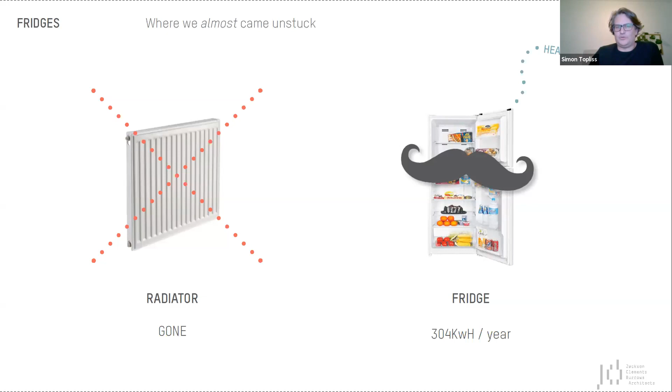For us, this was about doing different drawings as well, and this is some real IP for anybody out there. Because we were doing mass timber buildings as well as Passivhaus, we were introduced to this whole new world of acoustic gaskets, tapes, and strips that go underneath the CLT and tapes that go outside, and we needed to explain in one drawing where all these went. We could do it in the details, but people needed to price it and order it, and we couldn't figure out what we were going to do. So we ended up doing some really colourful drawings, but it was about understanding a new language because we really didn't have any precedents to look at, especially at this scale of construction.

Multiplex, our contractor, took these drawings on board, and they literally had to go out on a limb because they couldn't get any subcontractors to order these materials for them. They had to go out and actually order all these themselves and supply them, literally handing them to their subcontractors.

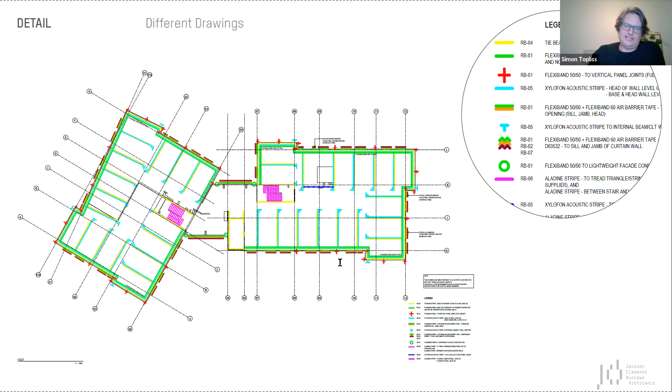To actually get this building over the line in the timeframe I talked about, we had to look at a very different design and procurement strategy. We were appointed in July 2017 for schematic design, and did our ECI tender—early contractor involvement—at the end of schematic design. So from schematic design through design development, we had Multiplex at the table. They weren't contracted at that point on the project; they were there to provide design advice, and essentially they came on the design journey with us.

They realised very early on what the project was about, CLT and Passivhaus, and really jumped on board, looking at the procurement issues around CLT and working with our project managers. We needed to start the shop drawings—the production drawings for the cross-laminated timber—essentially when we were at the end of design development. So working this into the contractual arrangements, with our project managers in the background, we were documenting our CLT before the contract had been let, and then once we were on site, we were actually finishing our documentation.

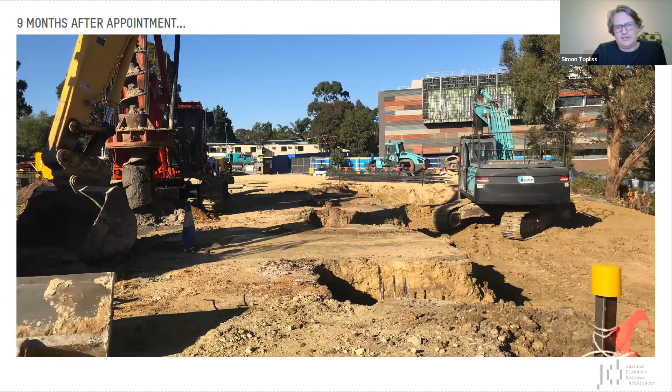This was an ECI fast track procurement process to make the project happen within these timeframes. Not every Passivhaus or mass timber project will be done this quickly, but to get these projects over the line, you need to think outside the box about how to get the contractor at the table early so everyone understands what you're doing, with engaged project managers helping you along that pathway. So nine months after appointment, we were on site starting excavations, and immediately we started doing things differently.

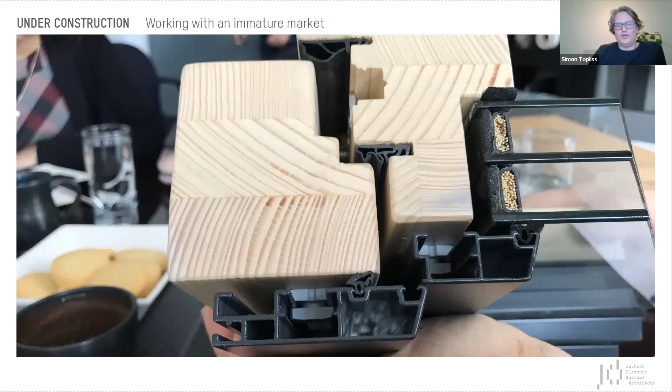You have the insulation under the slab with the vapor membrane. We were working with an immature market at the time. As Claire alluded to, probably in 2017 we needed 150 windows for the student rooms, and also large scale curtain wall type glazing for the knuckle areas.

We were really restricted in terms of the Australian market for who we could go to, so we had to look overseas - these are Doffner windows from Germany. We had timber windows internally, with a thermal break - you can see that little gasket - and an external aluminium cap to deal with weathering. These are really good windows and a wonderful outcome for the project. It's fair to say that in the three years since our project, the market has really started to mature, and we're seeing other products come online. But this was the nature of the beast in 2017, and working with an immature market meant we needed to order these elements early.

Things started to look different pretty early on once we started putting the mass timber panels up. Panel one went up on June 19th, 2018 - a pretty exciting day for everybody. There was a resounding sigh of relief, and I don't think another panel went up for three days. It was just a matter of getting that first panel up.

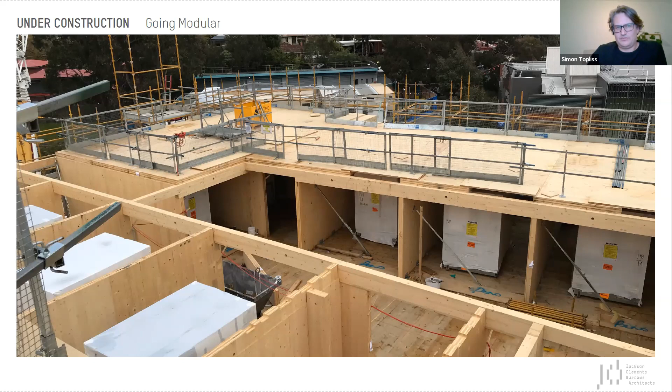We also went modular as much as we could to get speed of construction up, since we were trying to get this project over the line within 19 months. So we had modular bathrooms, getting the sequencing right with the mass timber, and at the back of those bathrooms is where the supply and return air ducts go in. This was also because we were externally wrapping this project in insulation, having this external envelope instead of internally.

We were fully scaffolding this building, which isn't typical for buildings of this scale because of the time and cost involved with scaffolding. Scaffolding was probably the major extra cost on the project with regards to Passivhaus. If we'd had more time, we could have gotten to a facade system that would have avoided scaffolding the building entirely. But we were time poor, and scaffolding was the best option to get the detailing we needed and ensure we could get the QA on that facade.

We had a timber top deck, which is our CLT panels on the top deck you can see here, and then 300mm joists sitting on that, fully packed with insulation. Again, we took our mass timber up to the top deck for speed, which gave us a really good pathway to an airtight envelope on the roof.

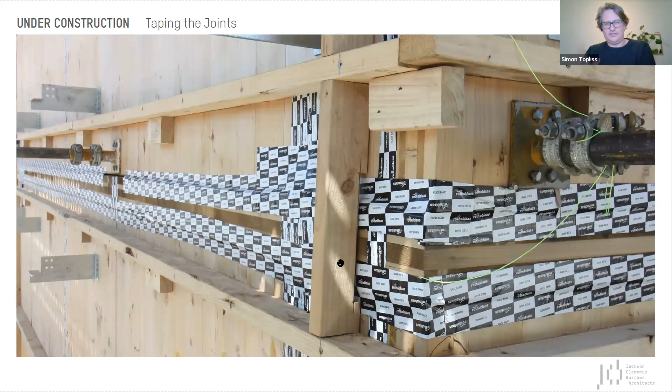Passivhaus is all about taping the joints and getting this airtight envelope. So all of our external joints in the building were taped, with Rothoblaas tapes running around between the wall panels and the slab. There was some overzealous QA going on site - internally we'd sometimes see the tape on the facade, and we even had the occasional subcontractor tape up the joint between rooms as well, thinking that was the right thing to do.

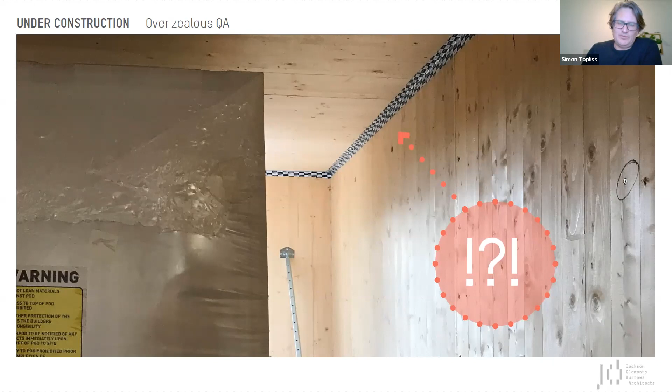In the end, I think everybody was just trying to make sure that this building was going to pass that test. So this is the blower door test at the end of the job, and this is our facade joint with our passive house windows on the facade.

In between the window and the CLT panel, you can make out there's a little compression gasket. This window is then taped internally and externally with Rothoblaas tape, providing a guaranteed airtight envelope. CLT sort of gave us, aligned to the low carbon credentials of the project, and something we were pretty excited about.

We were excited about it because mass timber construction in Australia is really just starting to get going, and it's got lots of potential. But we discovered really early on that it aligned really well to help us achieve this passive house envelope, both from an airtightness point of view and from a thermal bridging point of view.

So the layers of these facade layers: you've got the CLT, then those galvanized brackets - those are our facade brackets. They fix back into the CLT, and I'll touch on those more in a second. On that, you've got rock wool insulation, the vapor membrane externally, all taped up. Running outside of that is the rain screen, the cement sheet facade, and outside of that is the shading membrane.

I won't go into the fire engineering details of how this facade moved up, but it's fair to say on this project, it's the first time we've sat down and talked about a facade with the contractor, the fire engineer, the building surveyor, the structural engineer, the facade engineer, and ourselves - pretty much everybody at the table trying to work out the facade details. It was a real exercise in collaboration as we worked through the ramifications of this facade, and then getting it all over the line with the CFA as well.

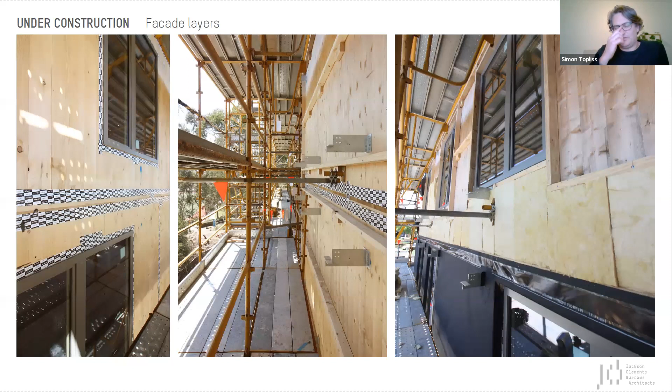The thermal bridging and condensation concerns - it was interesting that Claire put a picture of that up in the modelling of these brackets. These brackets, as we went along, were one of the things that just about caught us out on site.

So we needed to do more modelling to see whether these were actually resulting in a thermal bridge to our main structure, and potentially introducing condensation issues. Fortunately for Melbourne's climate, we weren't going to suffer from any condensation issues, and the minor thermal bridge we got through that meant it still wasn't going to vastly affect our passive house model overall.

I think if you were doing this detail in Europe, we probably would have got into trouble with this sort of detail, but here we were certainly able to get that across the line. That's probably one of the things we learned as well - that maybe in Melbourne, because of slightly milder winters, some of those issues weren't quite as prevalent in the passive house model.

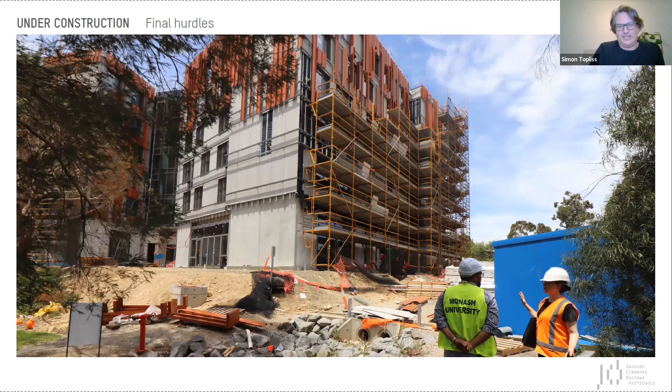But the final hurdles - it was about actually getting those final cladding panels on. This was probably mid-January, and things were getting a little bit frenetic, knowing that students were about to arrive in 4 weeks' time. But the main final hurdle was the blower door test.

You need to average it for the entire building, so they plant a blower on one of the ground floor doors, prime the blower up, and do a suck test - the average of that has to be less than 0.6. As you can see here, on the blow test this reading, we were at 0.47. So this was a pretty heroic day on the project, as we had passed our blower door test and we had our airtight envelope.

What that means - this building is a 6,500 square metre floor plate. I can't remember the facade area off the top of my head, but the overall opening on the facade to be less than 0.6 was 0.3 square metres. So that's an opening overall over the entire extent of the facade - it's 30 centimetres by 1 metre.

We were around about 0.25 square meters overall - that's every gap, everywhere, every little opening. I actually know where half the little trickle openings were on the ground floor. A really high level of QA had been carried out by Multiplex to get to this point.

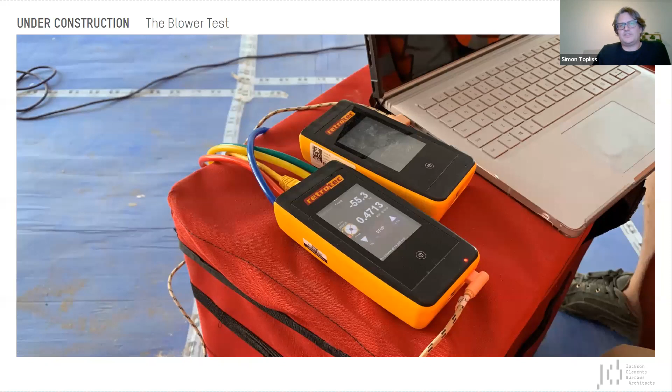You'll indulge me for a second now as I walk you through the finished project and give you a little bit more of an architectural completion standpoint.

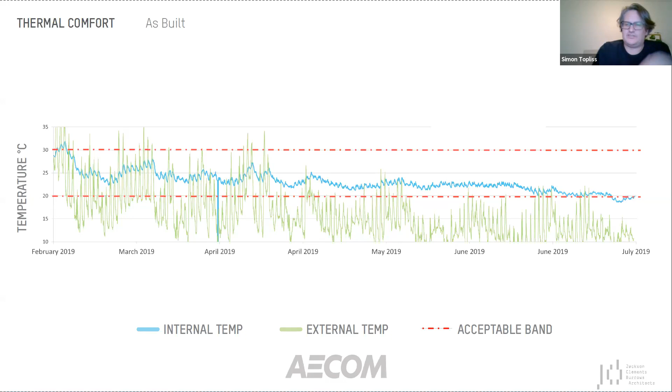We found out that 80% of the students had gone home for winter break, so we didn't have students in the building, didn't have laptops, and didn't have all our modelled heating loads. So to get the building temperatures back up, they brought in 5 panelled heaters for the model for the holidays.

I think for us, by achieving Passivhaus certification, we hope this project has proven the Passivhaus model in a warm climate at scale in Australia. We're proud that this building was not business as usual, but a design which celebrates the authenticity of materials and structure. It provides high quality indoor environments for its residents, and is a rich celebration of student life and the experience of living in community on campus.

I have to say we fundamentally applaud our client, Monash University, for allowing ourselves, the design team and builder to go on this journey. I think they managed to achieve something at Monash that's pretty remarkable as a benchmark in Australia. Thank you.